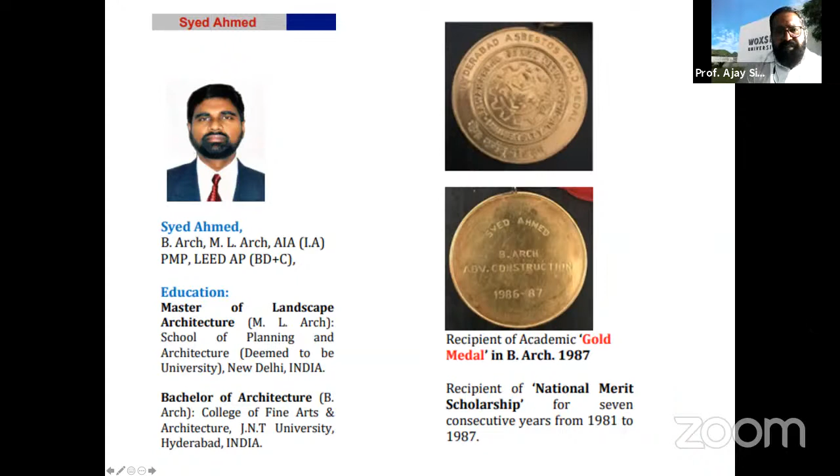Thank you, Professor Ajay, for a nice introduction. I would like to thank Dr. Amit Bhadra and Dr. Rahul. They gave very nice input. I am impressed with Dr. Amit Bhadra's knowledge about architecture and appreciation for Indian architects and Indian architectural monuments. Quite often, this is one of the best areas where we can see different kinds of architecture in different regions. It's more sustainable than what we are currently doing in modern architecture.

And also, like Dr. Rahul says, there are a lot of things happening outside in the world, which are much more interactive and more creative ways of handling the public realm, and how the cultural aspects have been imbibed within the design aspects. These are things we can learn from international architects, especially when you're working with starchitects and other big names. They know how to work with the local culture and also try to bring innovation, so that there is a perfect balance in the projects wherever they are doing them, whether it's Saudi Arabia or America or different parts of the world.

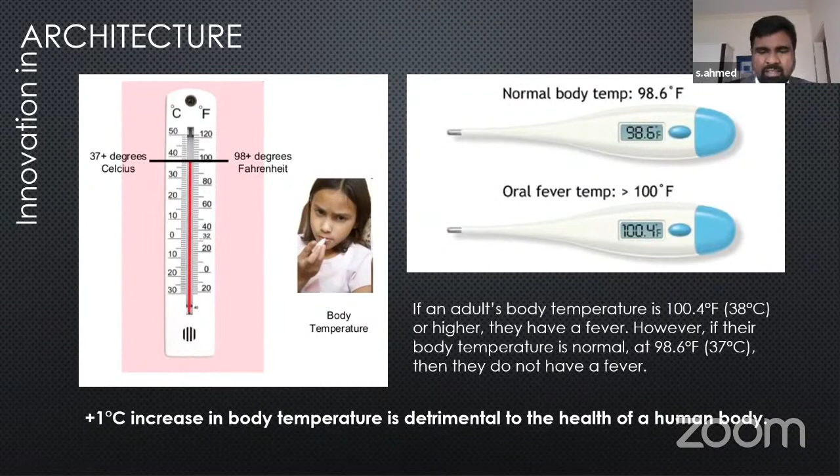You must be wondering, looking at this slide, that this has nothing to do with architecture. You're talking about human body temperature. Normally, a healthy person's temperature is around 98.6. If the temperature rises, what happens? We call it a fever. So a 1 degree increase in temperature makes a lot of difference in the health and well-being of a human body. Similarly, if we look into the big picture, the planet, what happens if it increases 1 degree centigrade? It will have a disastrous effect.

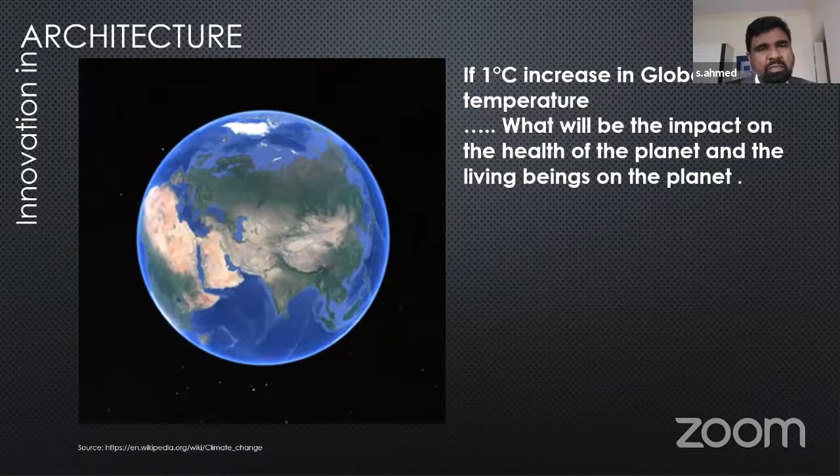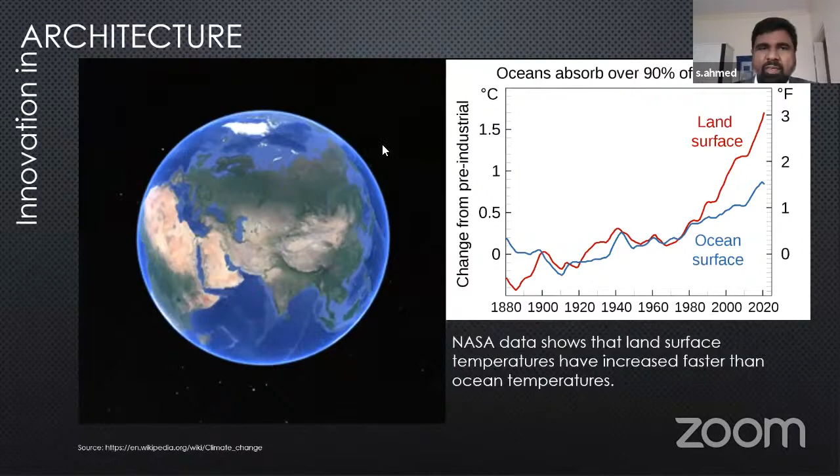Also, if you see the NASA data, it shows that land surface temperatures are increasing compared to the ocean surface, which is also increasing, but not substantially. So this is a very alarming situation we have now, looking at the global scenario. Of course, you can understand that we are talking about climate change, which is going to impact the environment. Some of the adverse effects of climate change are affecting the ecological balance of coral reefs, or extreme drought, which can also lead to forest fires, and landslides due to permafrost thawing, and also habitat destruction.

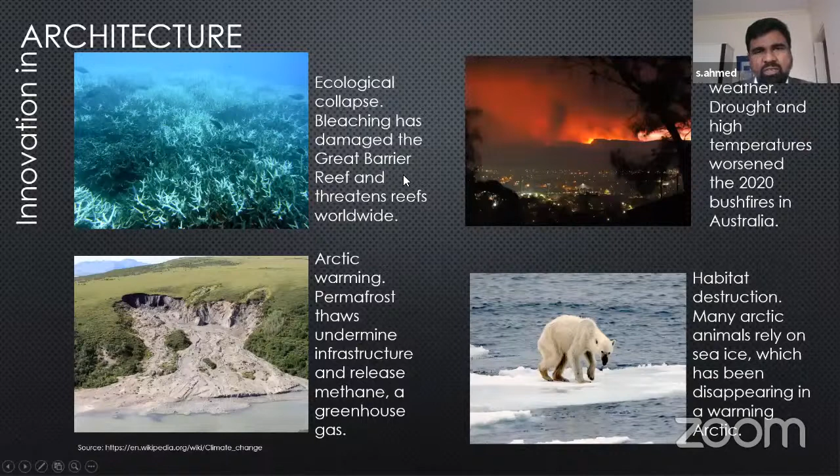And also, when there are temperature changes, the mild winters will allow more beetles to survive and kill large swaths of forests. And some of the environmental effects, like rainfall effects, lead to desertification. Also, sometimes flooding can happen. So these are all the ill effects of increasing the temperature globally.

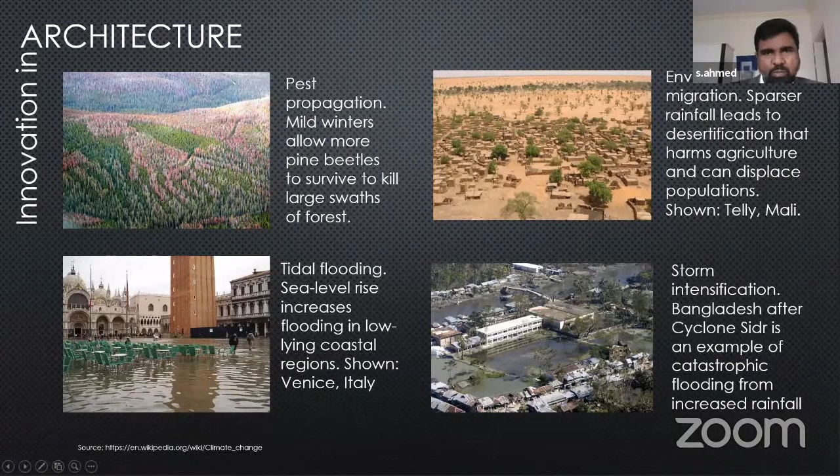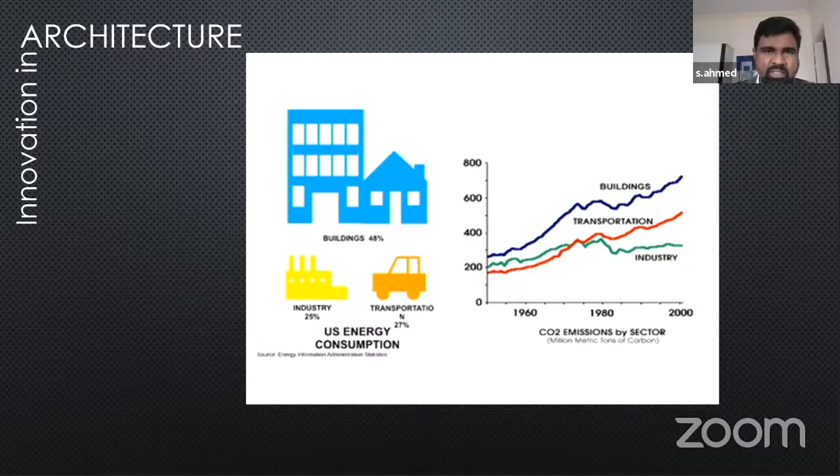So as architects, when we are doing new projects, are we really polluting the environment? To a certain extent, yes. And at the same time, as responsible architects, we should see how we can find solutions for that.

So in 2015, sustainable development goals were generated by the United Nations to combat global warming and to increase the quality of life. So there are several goals set. The objective is that by 2030 and 2040, most of these goals should be attainable.

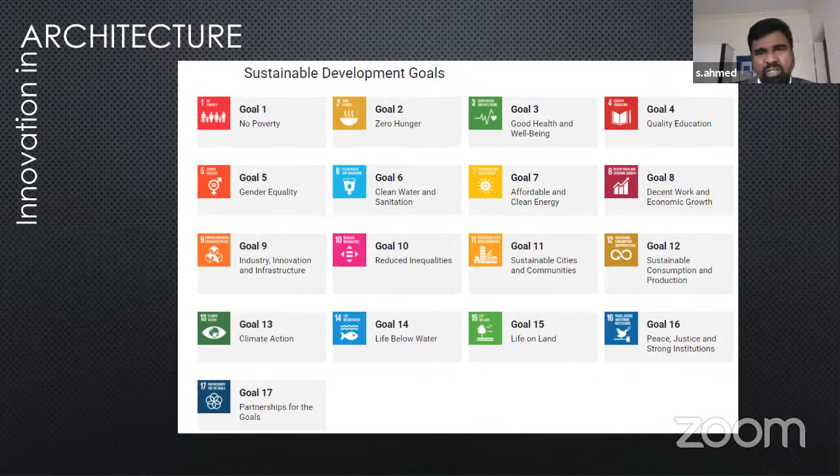So among them, not all are related to architects, but there are certain goals like industry innovation, then sustainable communities. Wherever our involvement is needed, we need to see how best we can contribute in helping the environment. So for example, goal number 9 is industry, innovation and infrastructure. So on the left side, you can see the challenges we have in terms of infrastructure and what the solutions are.

Poor infrastructure is a major barrier to good development. So we need to develop innovative and green infrastructure which can sustain for a longer period of time and which has less or no impact on the planet. Similarly, for environmental degradation, we'll have to create resilient infrastructure.

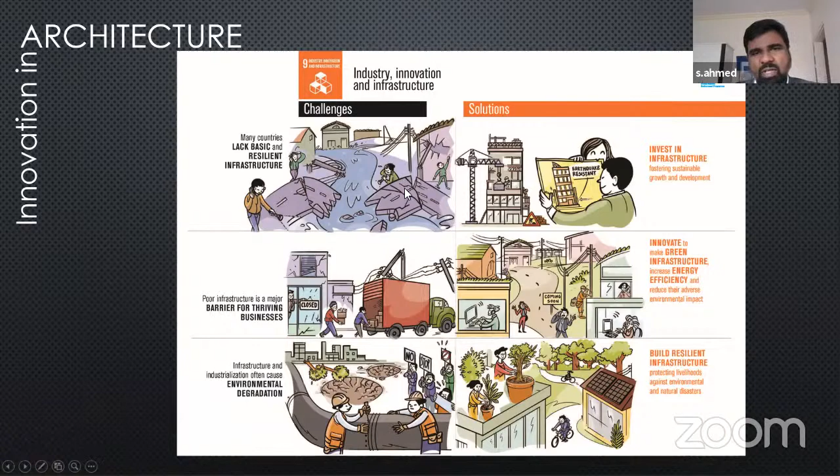Then sustainable communities. Due to rapid urbanization, especially if you see the slums in Mumbai and other major cities, due to migration a lot of slums are being developed and they're not being tackled properly. So we have to find solutions as architects at each and every scale, from small scale buildings to large scale buildings.

And most cities consume almost 80% of the energy, as well as generate 75% of the global waste and carbon emissions. So again, we have to see how responsibly we can manage our energy resources and energy usage.

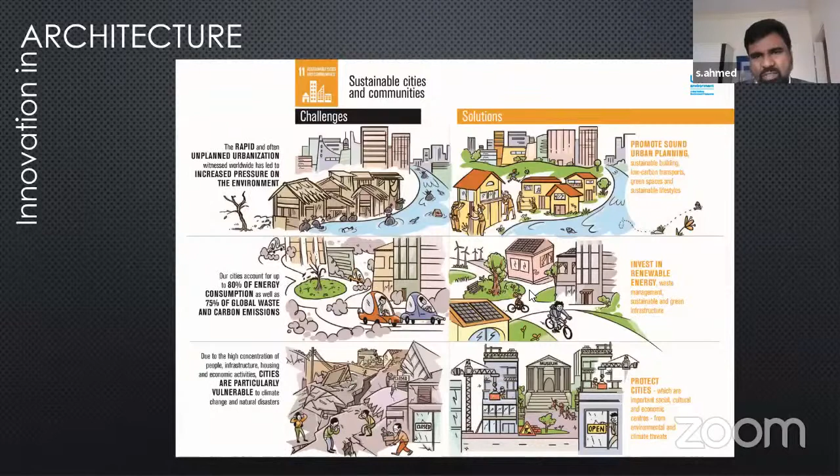So like I discussed earlier, global warming is one of the major issues, then storms and floods. So as architects, we have to find solutions in a more sustainable way. Similarly, dealing with desertification and saving biodiversity all happens at different levels of involvement of architects, landscape architects and engineers.

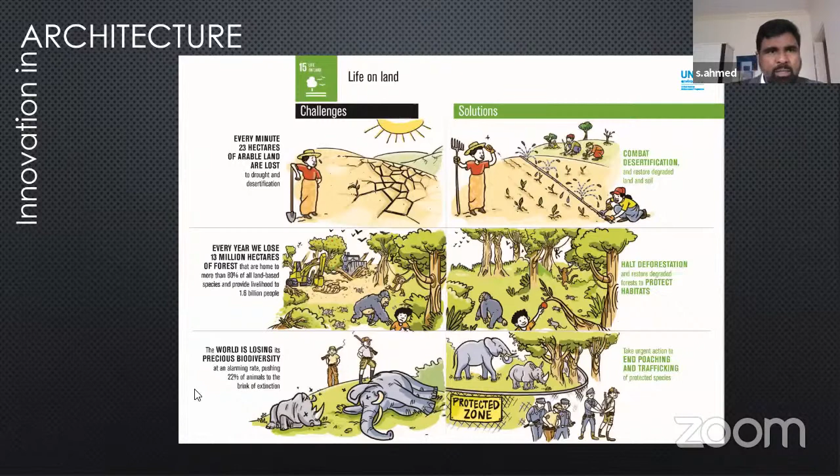So in a nutshell, climate change is everyone's crisis. As architects, we are uniquely positioned to help solve it. So the American Institute of Architects calls on architects around the world to support humanity's collective call to climate action through an unrelenting commitment to sustainable and resilient design.

Designing and constructing buildings that diminish greenhouse gases are architectural imperatives. Again, designing and constructing buildings that support health, safety, and welfare are ethical imperatives. So we have to see both architectural as well as ethical, and of course the cultural issues. Everything has to be looked into. So as professionals, we have the responsibility to prioritize and support effective action to exponentially decelerate the production of greenhouse gases.

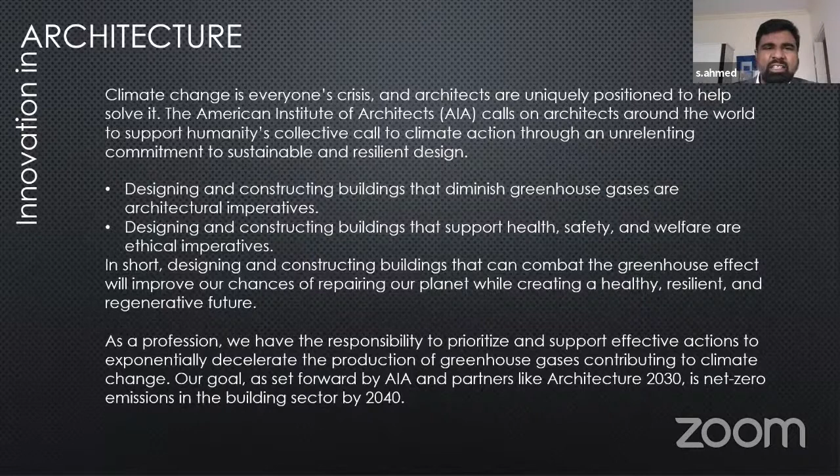So by 2030 or 2040, we should be able to control the emission of the gases. So how are we doing this? It is by sustainably designing the buildings. So it is our responsibility to work globally to reduce operational and embodied greenhouse gas production. Passive design techniques, again, like I said, most of the previous Indian projects and monuments are all designed based on passive design techniques. There is no active machinery used for cooling and heating.

Then employ energy efficient measures, adapt existing buildings. Instead of demolishing the old buildings, how can we conserve and reuse them in a more responsible way so that we really have very little impact on the carbon footprint. And at the same time, we have to look into the business and financial aspects to make all these projects viable.

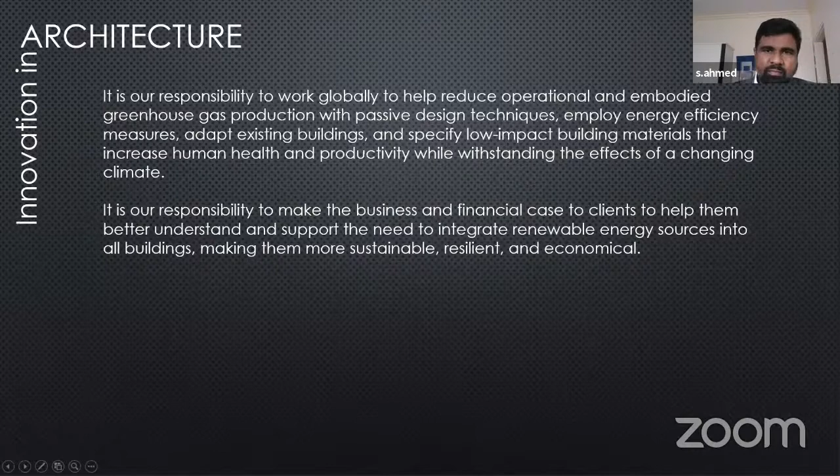So in this direction, sustainability is one of the key movements which has been generated. At this point of time we have various sustainable rating systems. I'm not going to list all of them here. Basically, BREEAM, it was UK based, started in '89. Then we got LEED in '94. Estidama is mainly for the UAE. So there are different ones; even in India we have green rating systems. These are all focusing on reducing carbon emissions and creating a good quality of life.

So among them, LEED has taken over and has quite a wide market range and reach across the globe. Some of the credits which I can talk about here are transportation, energy, indoor environmental quality, water efficiency, sustainable sites, and materials, how we are going to use the materials. All these are very important in sustainability.

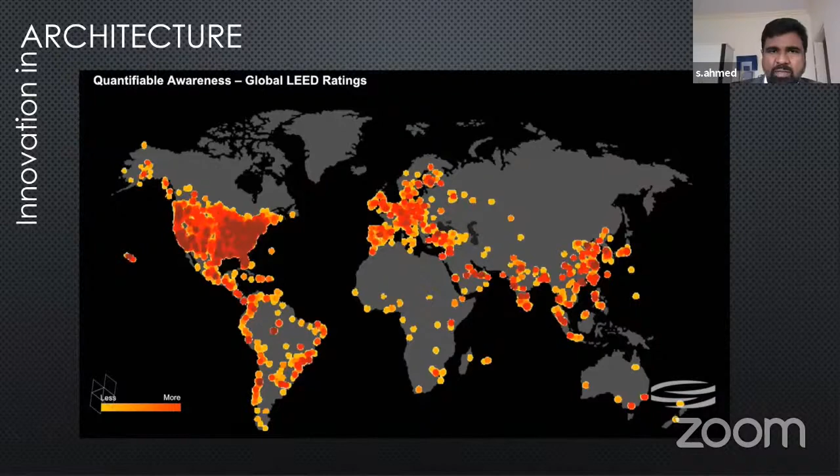So sustainability and innovation. Innovation is one of the rating criteria within sustainability. Innovation is implementing ideas that result in the introduction of new goods or new services. How best you can make the building very efficient, how you can help improve the quality of life of the users. This is what is required. In general, innovation is distinguished from creativity by its emphasis on the implementation of creative ideas in an economic setting. So we have to achieve economics in terms of not only the cost, but the material usage and the operational maintenance, all these aspects, which will have less impact on the environment.

So usually for any innovative process, there are 3 stages. You have to have idea generation. Then once you get an idea of how to solve the problem, you implement it. So this is the 3-step process which as architects we generally use, but to go beyond that level, for example, 1 + 1 is 2, that is simple mathematics, but how can we go more than 2? That is what we have to see in innovation.

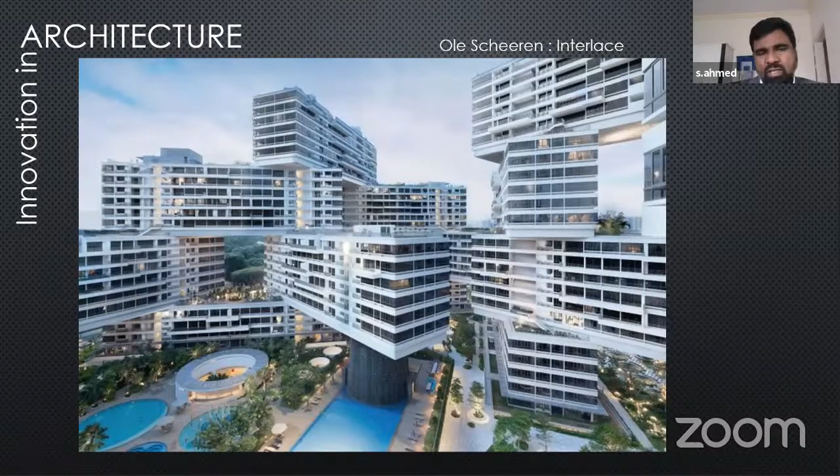So I selected a few examples to illustrate how architects are working to help the environment and to achieve more than 2. One of the projects, in Singapore, is The Interlace. You can see it's quite an interesting configuration of the blocks. This is an 8-hectare site with 1,000 apartments to be built. Initially, on the left side, what you can see is a cluster of high-rise towers, which would have been possible as per the building bylaws and local regulations. If it is built this way, then you don't have enough green space, and you'll be looking into each other's buildings. So there won't be any privacy, and a lot of issues.

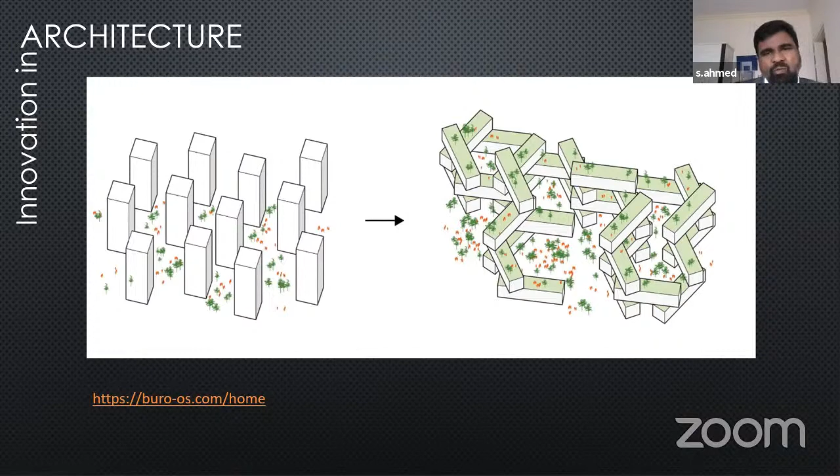So here, you see mathematics. The landscape area after the buildings is around 66,000 square meters, but the sky gardens almost have around 23,000 square meters. So put together, they have achieved 112% of green, which is much more than the actual plot area. So this is one of the key innovative ideas to bring into the project.

So this is like one of the benchmarks. I would suggest as students you should think in a different way: how best you can use guidelines, local bylaws, and then improve upon that to achieve more than what is required.

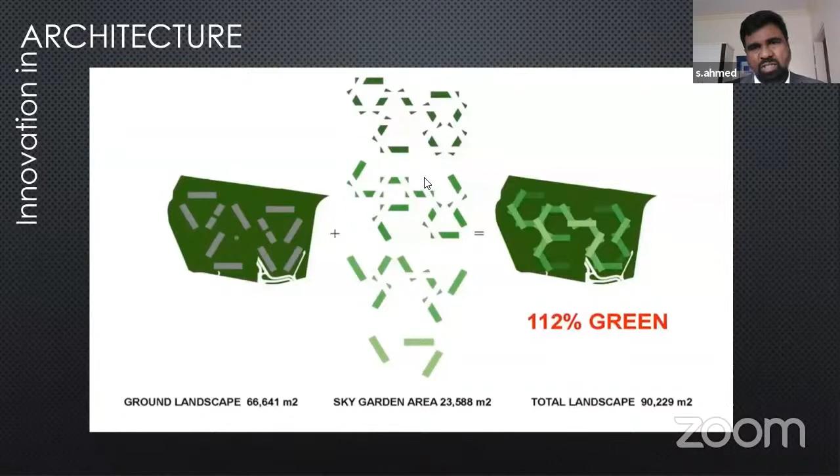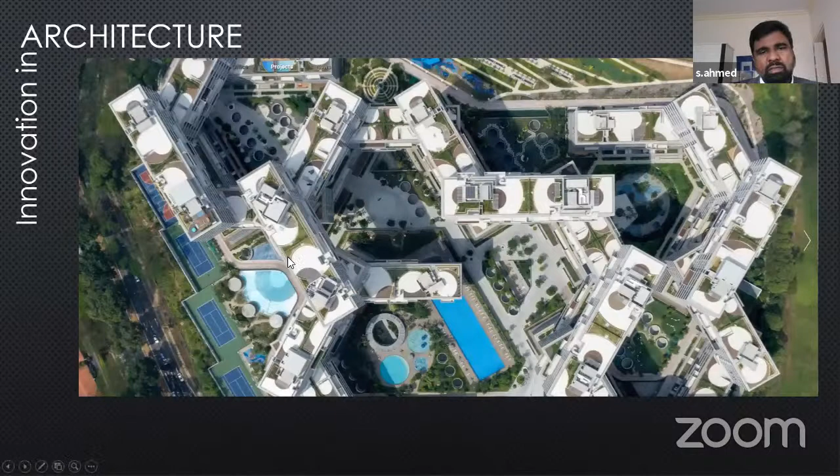So this is the same project with the aerial view. You can see how the blocks are arranged in a hexagonal manner, which creates a more open and lively environment. Again, this diagram shows the shading studies. The blocks are designed and located in such a way that most of the courtyards are well shaded and they provide relief.

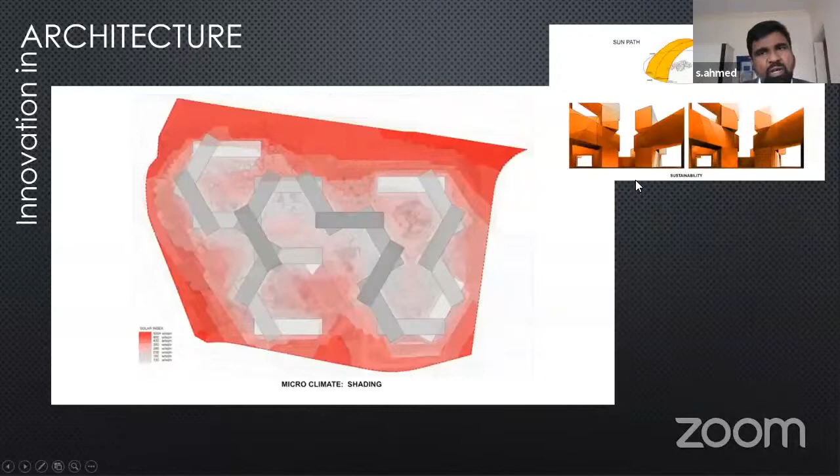So the configuration of the blocks, how you place them, how you orient them is also very important, of course taking care of the sun movement. Again, the same project: the water bodies and the wind directions. So you have to study the wind, the movement, how the water evaporative cooling is affecting the courtyards and improving the microclimate.

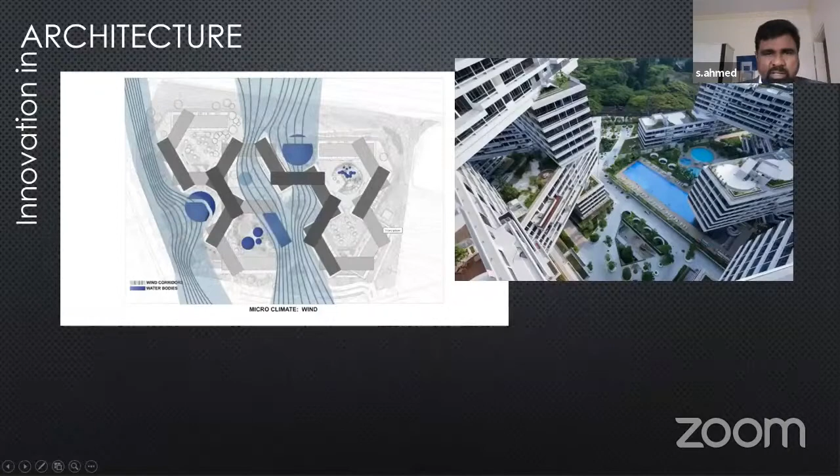When the new master plan was developed by Foster Partners, they tried to minimize the buildings and increase the landscape area. So it looks like a forest. The building is within the forest. It's not only giving the form, it looks like a satellite placed within the dense Amazon forest. That will create a very nice microclimate, and also it reduces CO2 emissions. It absorbs a lot of CO2.

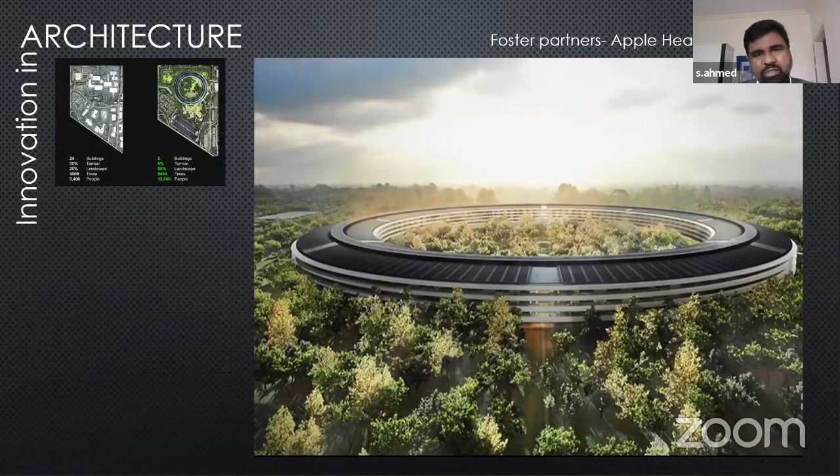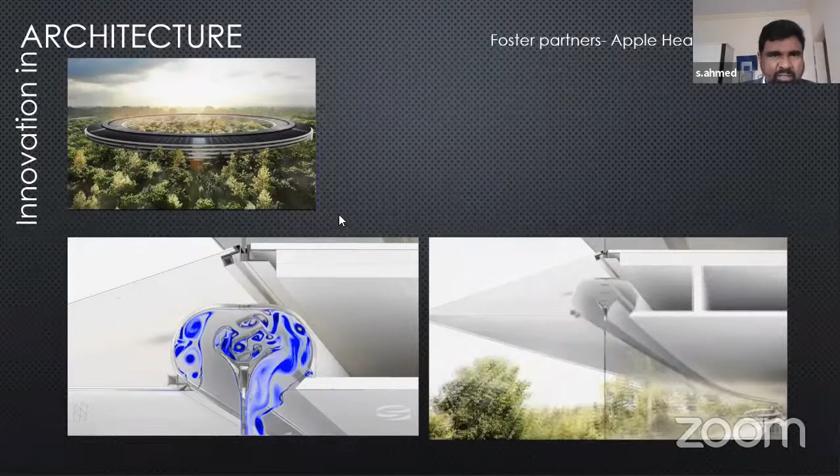And one more example which I would like to share with you is by a Danish architect who is practicing in different parts of the world. It is a waste-to-energy power plant. Usually a power plant using waste is just a building not to be visited. But here the building has been designed in such a way that it has become part of an educational project. In Denmark, they don't have any hills, but they have the snow. So he invented an idea: why don't we use the size of the building in such a way that you can use the roof for skiing.

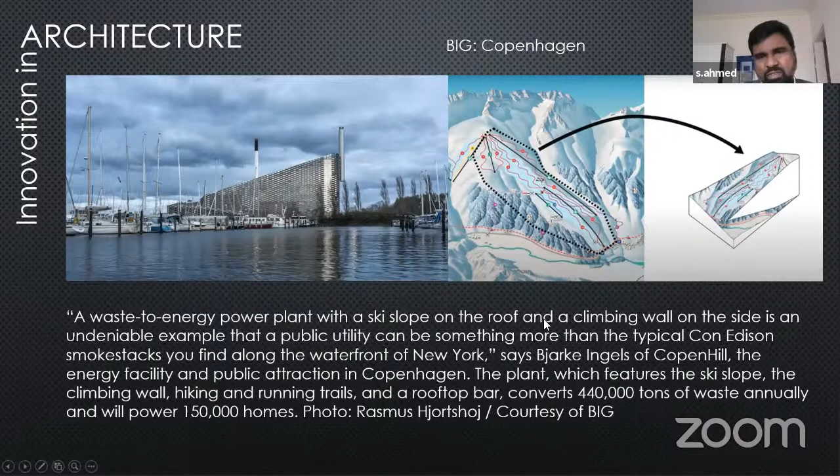Also, you can see in this picture how the roof has been used as nice skiing slopes, and also wall climbing, trekking. There's a lot of activities. So the building has been created as multifunctional. At the same time, it's producing energy out of the waste. So these are the ideas. Once you start looking into how you integrate the local requirements, the functional as well as the cultural requirements, you create something new which is not available. So these are some of the best examples of innovative architecture.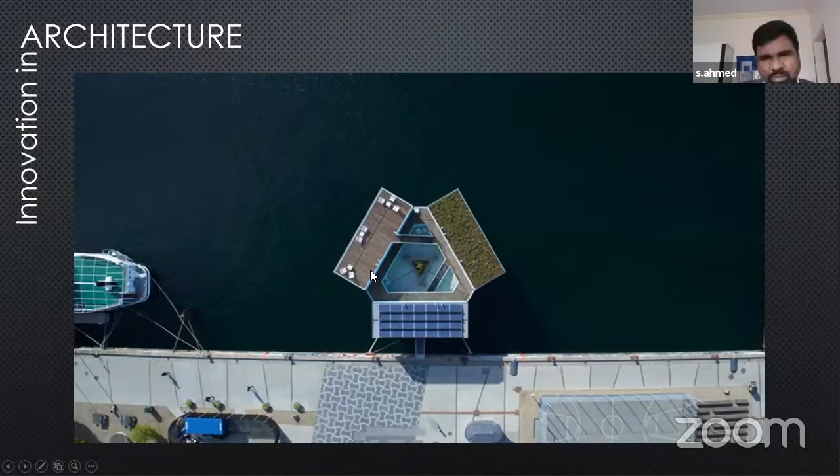Again, one of the projects developed by BIG team uses cargo containers. They built student housing. It is like a modular one, using containers developed on a floating dock. This has been built somewhere, brought to the site, and installed here. So the idea is low cost, quick construction, and when there is a shortage of land, you can expand into the water. So this is like one cluster which is self-sufficient with solar energy generation as well as natural cooling.

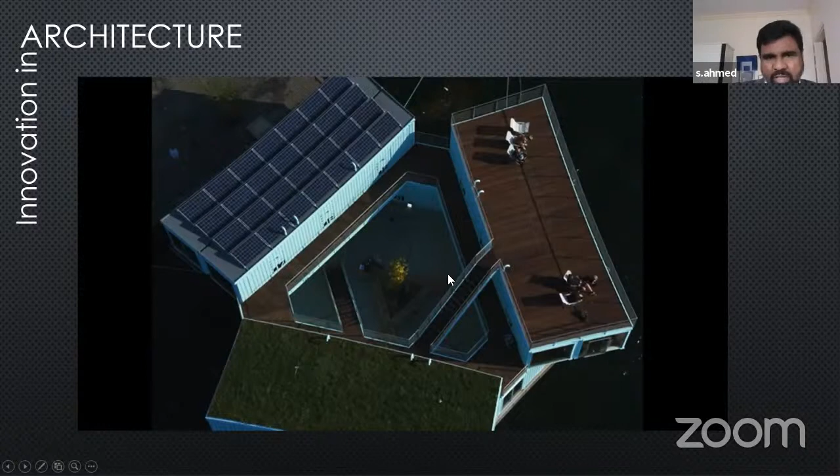So these units, if you see, have been joined together to make a cluster of buildings. And this has been anchored, if you see in the section. In the lower part, which is sunken in the water, they have hydroponic gardening inside, and the upper level is a 4-story structure made out of wood. So the materials used are also innovative. We really don't need to always use steel and concrete.

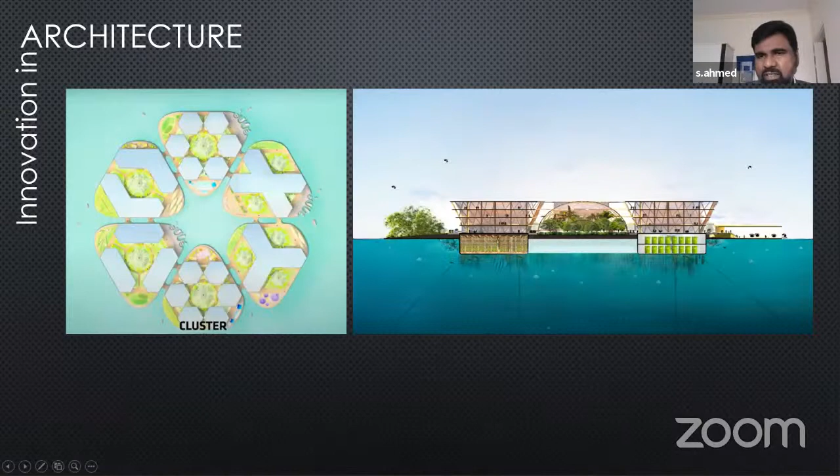So this is one of the concepts where we need to expand these clusters like a floating city. How can we do that? These are some of the different concepts for where sea level is rising. So we design to mitigate those effects so that we can actually get a floating city.

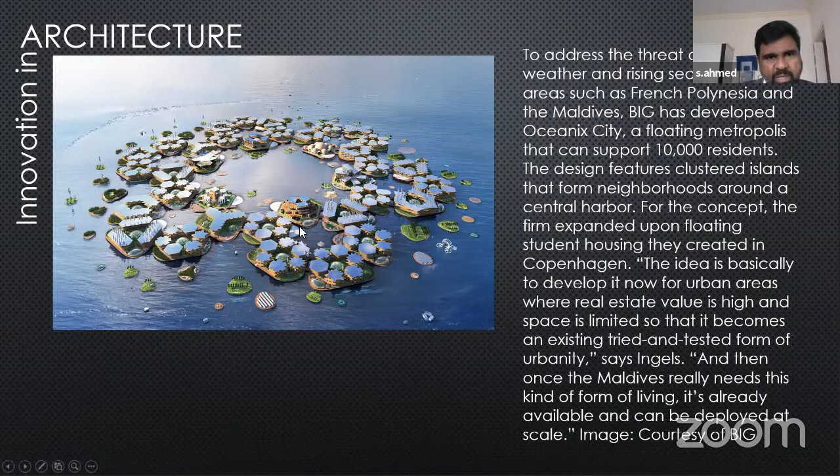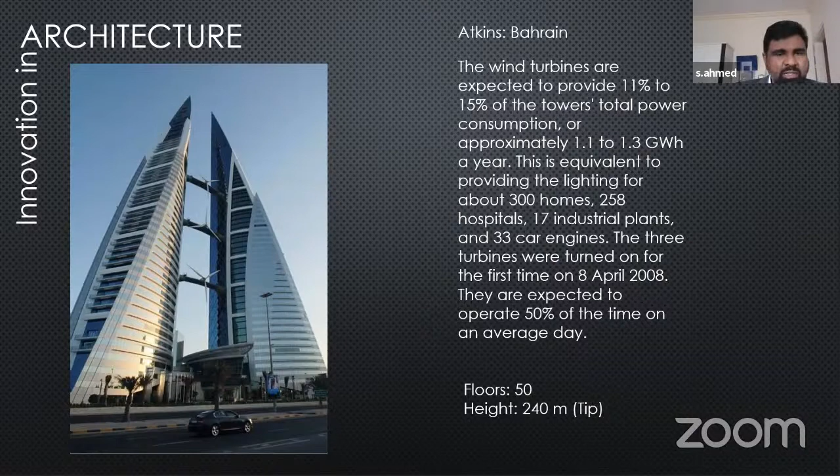The buildings have been designed in such a way that the wind funnels in the V shape, so that creates enough draft for the windmill to work. So all over the world, architects are trying to see how best we can utilize the current technology in terms of construction methods, available materials, and how to reduce energy consumption and the carbon footprint. This is another view of the same project.

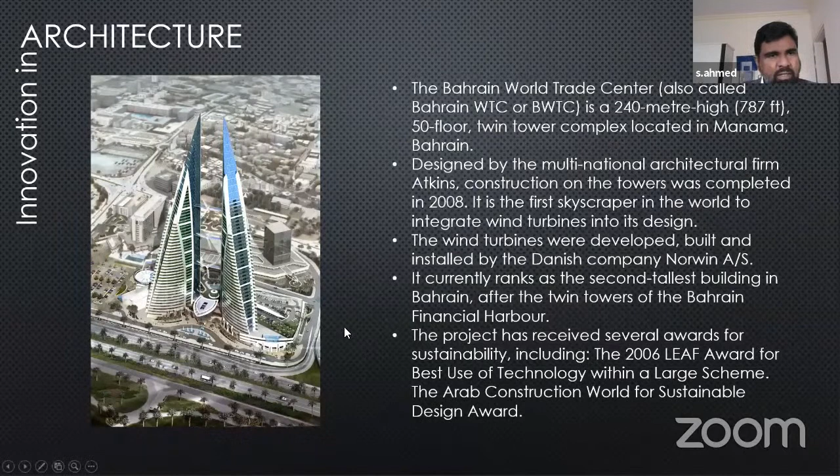Then there's one more recent project which is done by Gensler, which is now the second tallest building in the world. The first tallest building, I think all of you must be aware, is the Burj Khalifa, which is in Dubai. It is 830 meters. The second tower, which is in Shanghai, is 632 meters. So what is the specialty of this tower?

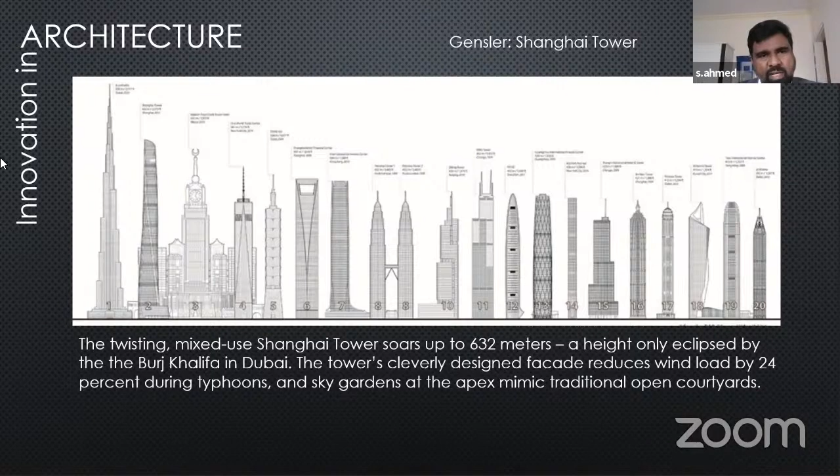This tower has been built with a unique shape. If you see, it is not any regular shape, it has been twisted to create less impact of the wind. So when they did the wind tunnel testing, they tried to optimize the shape and the rotation. That way they could save nearly 24% of the energy and the cost. So almost $58 million have been saved just by shaping the building in a proper way.

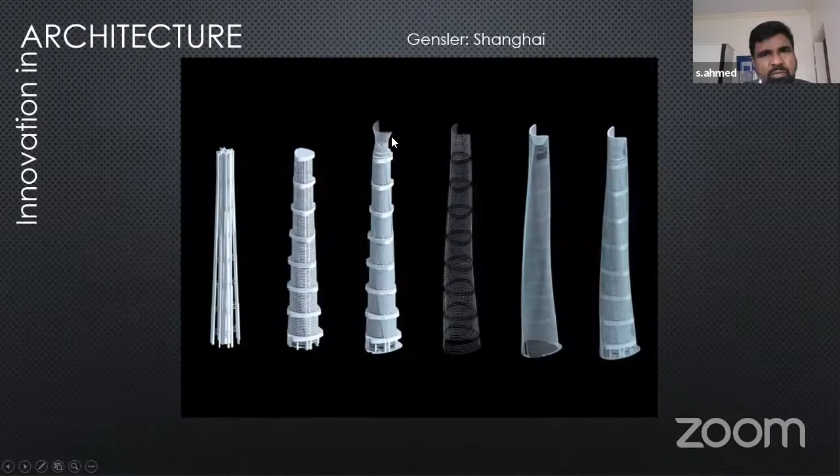So a lot of engineering has taken place, especially the wind engineering and the forces, how it will be designed. There are some of the models which show you how the structure is stabilized and how the rotation of the tower has taken place. And again, it's a double skin building where the outer skin is quite translucent, so it also reduces heat gain. So this is one of the LEED platinum buildings.

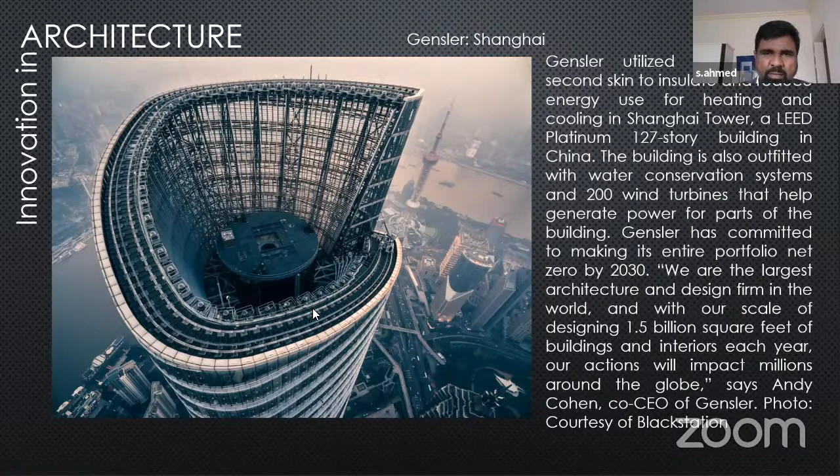And coming to the projects within Saudi Arabia, this is one of the projects which we worked on with Norman Foster. It is the Haramain high-speed train stations. There are 4 stations within Saudi Arabia: Makkah, Jeddah, Medina, and Rabigh. These are the stations designed in a prototypical way, but with slight variation in terms of the colors and whether it's a terminal station or a pass-through station.

If you see here, Islamic cultural aspects have been taken in shaping the forms, but at the same time, the daylighting has been achieved with minimum perforations within the roof as well as in the fenestration. So during the extreme hot weather, where in summers it can go up to 45 to 50 degrees, still you don't need too much cooling here because of the high ceilings and the limited perforations. This we worked on as collaborative architects with Foster and Partners.

This is one of the stations in Jeddah. Again, all the outdoor activities, the connection bridges, everything is fully shaded to create comfort, and there is a lot of landscaping well developed in this area.

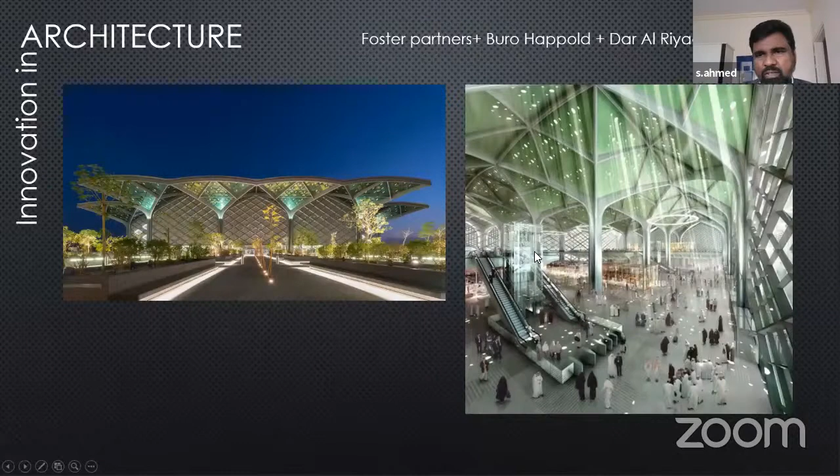This is another project, the healthcare project, which we have done in association with Cannon Design. Cannon Design is a healthcare specialist, and we are the joint venture partners with them. So this is one of the existing hospitals where almost 70% of the site is fully developed. So we hardly had much space left for designing and locating the new program of the Biotechnology Center, 330-bed cancer care hospital, and VIP wings.

So here we tried to see how best we can orient the building, and also there was parking all along the surface. This parking has been removed, creating more green areas. All the parking has gone to the 3 levels of basement, which is naturally ventilated, so very little reliance on mechanical systems. Also, there is a 1.4 kilometer long internal tunnel which is supplying all the utilities, infrastructure services, food supplies, and pharmaceutical supplies. Everything is happening there.

So this is one of the projects within the King Faisal Hospital, which is yet to be constructed. This is the Biotechnology Center. So here the main idea is to create a more healing environment for the hospital. This is what has been created. The surface parking, which was there earlier, has all been removed and taken down to the basements, and all the surface has been created for nice green landscapes. So this is one of the award-winning projects.

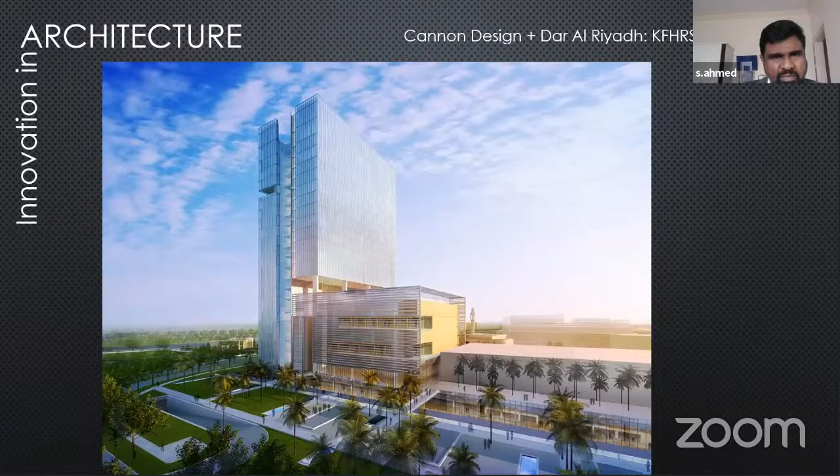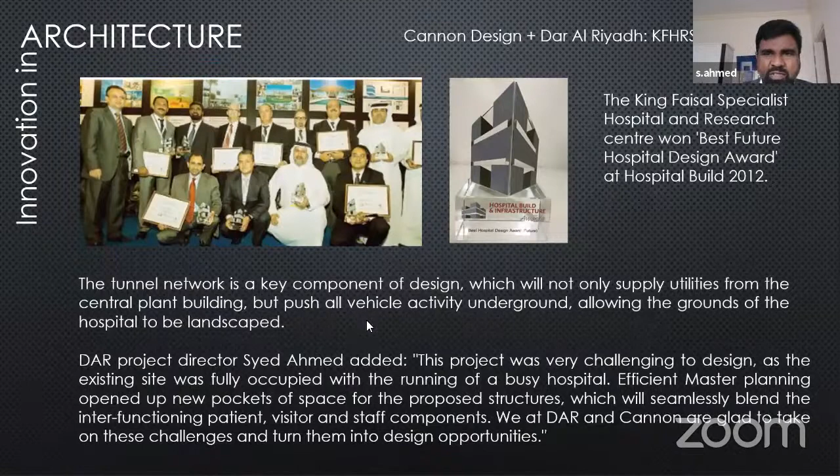And apart from the large buildings, we also work on large master plans. And this is one of the race courses. Here, the main challenge is to create enough water for the plantation, as well as maintenance of the desert plants. This is a world-class race course, 3 kilometers long. And the buildings were designed by Hong Kong-based architects, Leigh and Orange. And we did the master planning and landscape.

Here, the innovation is basically when you are looking from the grandstand, there are a lot of sandy winds because the surrounding area is quite a desert area. Always there is dusty sand coming up. So to create a kind of a backdrop, a small hillock has been created, and with the plantation that will mostly filter the winds which are coming to that area.

So in a nutshell, what I was trying to say is, whatever project you are doing, you should try to see the local environment, the technology available, the material available, and how you can use it in the best possible way. I could not show you many other projects which are quite small in nature, but it doesn't need to be only the big projects. Even in small projects, innovation can happen at any scale, right from furniture design to the interior of a house, to a small community or big projects.

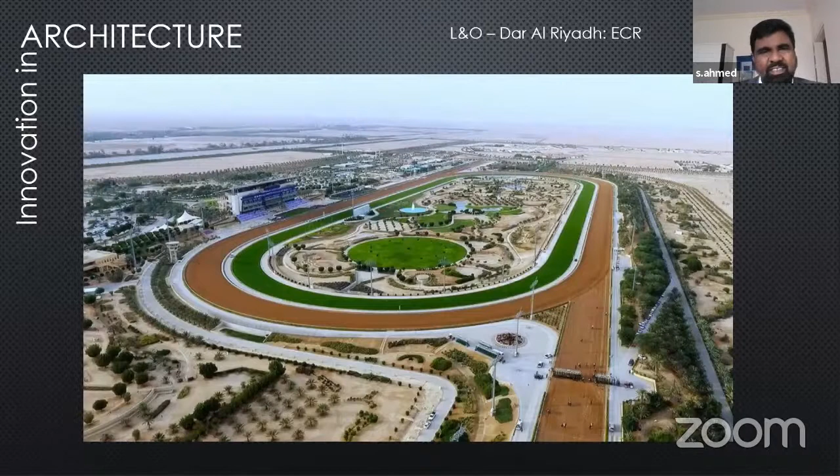Thank you for this wonderful presentation, sir. And thank you for, again, making a point about creating awareness on that 1 degree temperature; it was a very solid point, I suppose. So we need to start looking at that 1 degree, how to reduce that 1 degree. It will make a whole lot of difference. And thank you for letting us know about the innovations in architecture. And I think this is rightly needed for students who are just starting out, the first and the second years. Starting off from here is always good for them.

And thank you for introducing some of your projects and also projects from other architects like Foster's and BRK; we have been discussing BRK a lot in our sessions also. And there's one project of BRK's which we did not actually have a look at, but we'll definitely cover that project also. And cargo containers is one of the problems which we are trying to give even to the first or the second years. So, thank you, sir, for giving a heads up that things like this are there, so you also can try and do something.

And your projects, like working with Cannon Design and KFHRS, I think there was a whole lot of innovation involved in that. I was waiting to hear more from you, but since it was only the first and second years, you might have had to cut it short. But I do hope in the future we are going to hear a lot from you, sir. And definitely we'd like to be more associated with you. We'll definitely keep in touch, depending on your time and availability. Sir, it will be my pleasure.

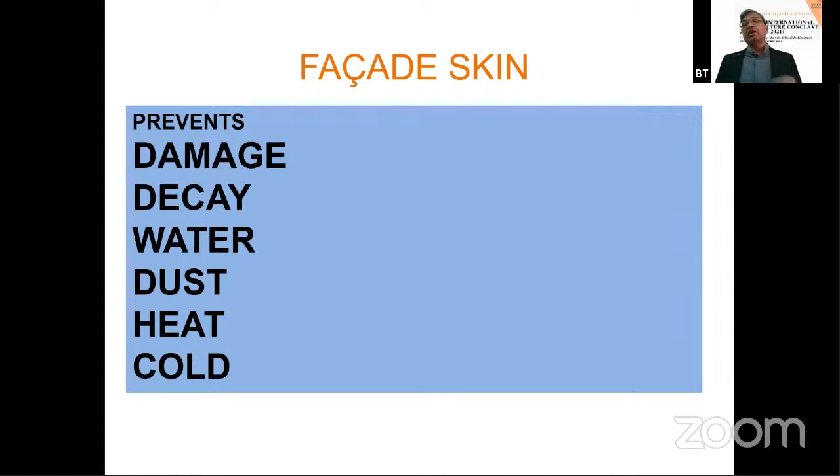And so by protecting one from outside to inside, architecture does this in many different ways. How you treat your facade, how you treat a particular face of an architecture, is also giving it an identity, because you create a person's identity by its face. And in the same manner, it is expressing what the building wants to say. Does the building want to say it's a museum, or a house, or a courthouse, an office building, or something else? So it has an expression built into architecture.

When we had an opportunity to speak to Foster a long time ago, there was a conversation about what he does to his buildings. He treats all the buildings most effectively by saving energy and using the purity of structural work. So there was a question: can I drink wine from a teacup and tea from a wine glass? Both are serving the same purpose, because the liquid takes that shape and then you drink it. Why not a wine glass be used?

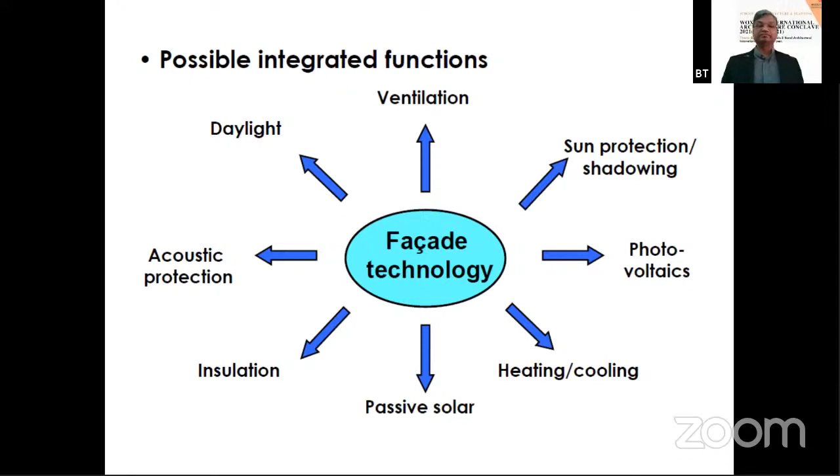And this can be done in many, many ways, because when you separate the skin from the main masonry or main, what we call rain screen of the building, then you started to evolve into architecture that's multi-layered. You're no more having a building that has just 4 facades. You have basic 4 corners, 4 envelopes, but you started exploring the front, or the roof even, into multi-layers. The multi-layers will become attractive to basically do a few things.

Most importantly is the heat. You're trying to protect from the heat or generate heat. So in colder climate, they're trying to generate heat to the buildings. In the hot climate, they're trying to protect the interior from the heat. So for example, if we take the Middle East, the outside temperatures go up to 50 degrees under the shade. 50 degrees centigrade under the shade is not a comfortable temperature to just go out.

But you want the temperature inside to be about 21, 22 degrees, which is a comfortable temperature to work, live, or play. So that 30 degrees of separation is created by having innovative materials like triple glazing these days, or creating multi-layered shading in front of that facade, so that it is first of all protecting. It's trying to transition from 50 degrees to 20, 25 degrees. So that's very important. By doing these multi-layered facades, you are trying to create major energy transfer into the buildings by this.

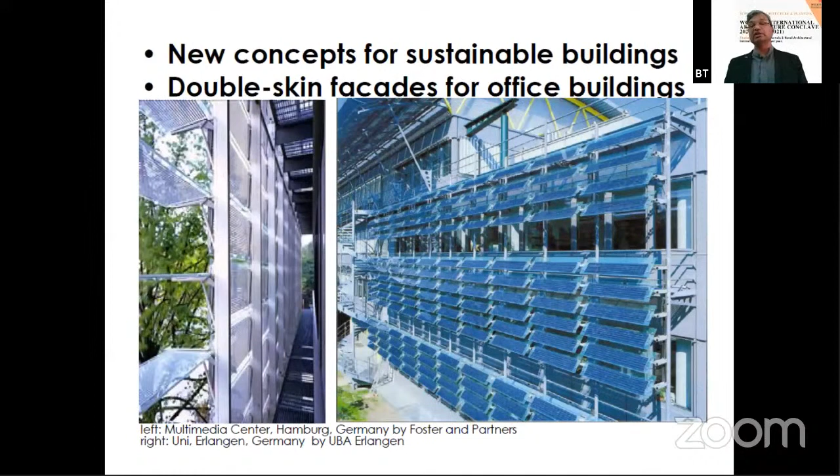It is not just energy transfer or saving the inner climate from the outer climate. It is now becoming an energy saver, because the more you save energy by not allowing the heat to come inside, or not allowing the cold to be heated by generators or heaters, and the facade is purposefully doing that function, generating the heat or cold by itself, cooling the building by itself. It is actually saving energy, because most of the energy in the building is consumed by the comfort that we are trying to achieve with mechanical means, that is cooling or heating the building interiors.

So if you go to any of the malls these days, the entire mall is air conditioned. So that means at the back of the mall, you would see so many generators working and so many air handling units working, pumping cold air into the project. So all that is consuming natural resources, that is generators being run by diesel, all the energy that is coming from coal plants probably. So all this is energy consumption. So what we are trying to do is save that energy by blocking the heat from coming inside.

So instead of 50 degrees centigrade outside, if you block it by any means, the next layer will be about 10 degrees less, maybe it's 40, 30 degrees, then the layer of your envelope would further protect you maybe another 5-6 degrees. So your cooling of the building will be reduced quite a bit.

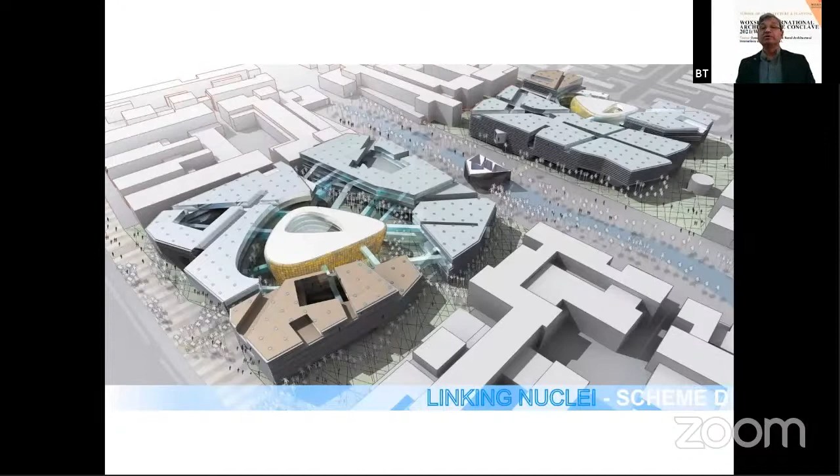So the building facades actually are generating energy, generating electricity, which is being used within the building. So you are neutralizing whatever energy you would like to use for the building by generating it from the outside shape of the building. So I'll quickly go through some visuals and see how buildings are being attempted.

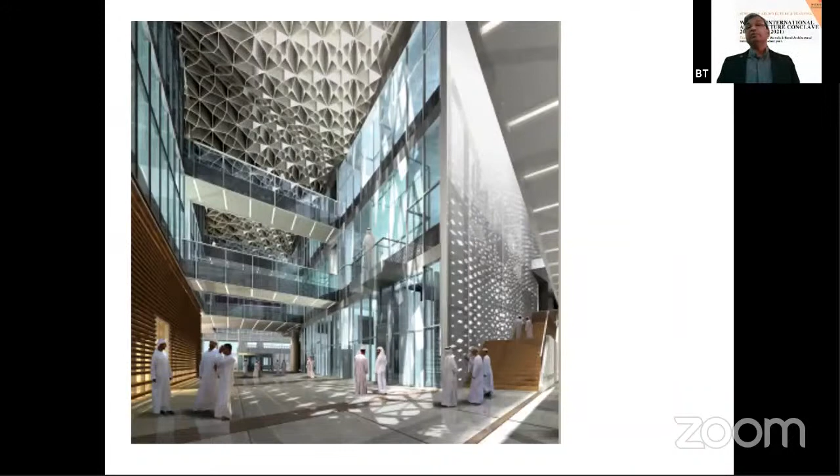These are multi-layers of facades. This is a building by NBBJ, College of Science. Most of these are institutional buildings that I worked on, which have several layers of built-in aluminum or fenestration facades. Aluminum is a great material when done appropriately. It cuts off glare, cuts off energy or heat from directly transmitting in. For example, this one is innovatively done by creating a diamond-shaped shading, which is attached by structural means to the outside skin.

So what it does is a couple of things. One, it doesn't allow the sun to directly come in. So the 50 degrees temperature is being blocked and it's shading the glass behind it. But at the same time, if you see the fountain below, it's trying to cool the air below. So that cool air is being passed on between the skin and the facade, trying to revolve the air around the building so that it creates an inner courtyard kind of arrangement within the skin.

So on the right, you could see how the facade has been jointed. Here, it's a very standard approach where the louvers, which Le Corbusier used many ways in concrete, but here it's a skin that is attached to the major glass wall or the curtain wall behind it. The vertical louvers provide the shading from the west, which is a very hot sun in Kuwait, to allow shading into the building.

Sometimes, when we have to bring in natural light, the roof has openings, roof lights. The roof lights have now been provided with solar panels as well as withdrawable shading devices. It could be fabric, it could be something like this, which can be drawn back and then opened up when the climate is better, or closed off when the climate is too hot.

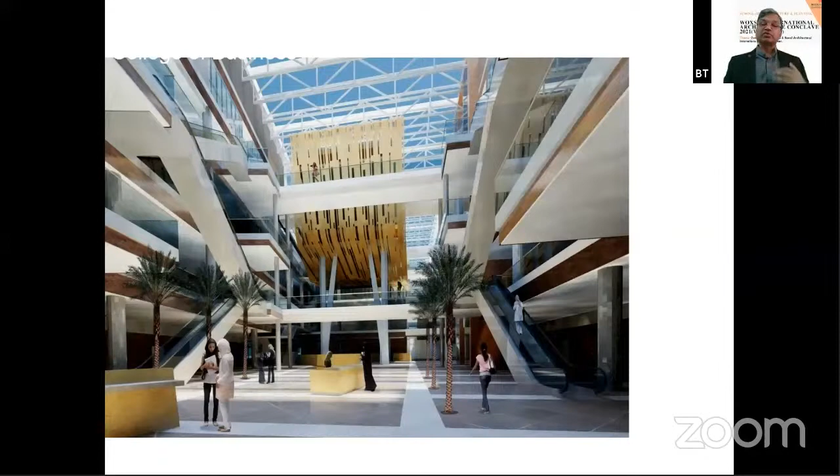And the other aspect is using GRC, for example, glass reinforced concrete, in this way, where the architects used it innovatively to envelop their buildings into a complete facade where openings are kept only to a minimum. Anyway, these are examples from the very hot climate, but you could do the other way by allowing the light to come in and produce heat onto the glazing, so that your heating load is reduced in colder climates.

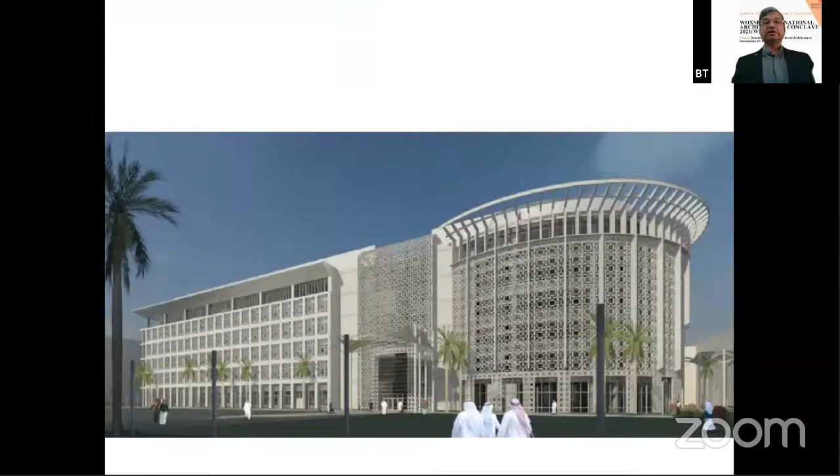Here, the same thing. Originally, the architect's intention was to put glazing, a completely glass facade, then it turned into a fiberglass facade, which is protecting it from outside. So this is the in-between space where there is the glazing and the actual facade. Most of the time, this is not very new to the Middle East, because in the Middle East the climate has always been a problem, and architects found different solutions.

There is a word called mashrabiya, which is like a jali work, what we call jali work in India. Many of the balconies have a jali in the front, and it allows you to go there and get cool air, because it's got smaller openings. When the hot wind hits it, it gets reflected, and when you are sitting inside the balcony, you feel cool air coming in, because the hot air is transmitted into cool air. And this sort of does the same thing.

They create an aluminum kind of jali work around the building, and with the wind flow, try to cool the facade, which is inside this jali work. This is the space between the jali or the mashrabiya and the actual facade inside.

Another interesting building by SOM architects, where they have coined this as a form. Shades of Knowledge is the name of the building in Arabic. So this created completely a building within a building. They have enveloped the entire library, actually this is a library building, with another shaded building. So the outside aluminum panels have graphics. In fact, they were designed by artists themselves, looking at Islamic architectural patterns and how they can be transformed into something modernistic and innovative.

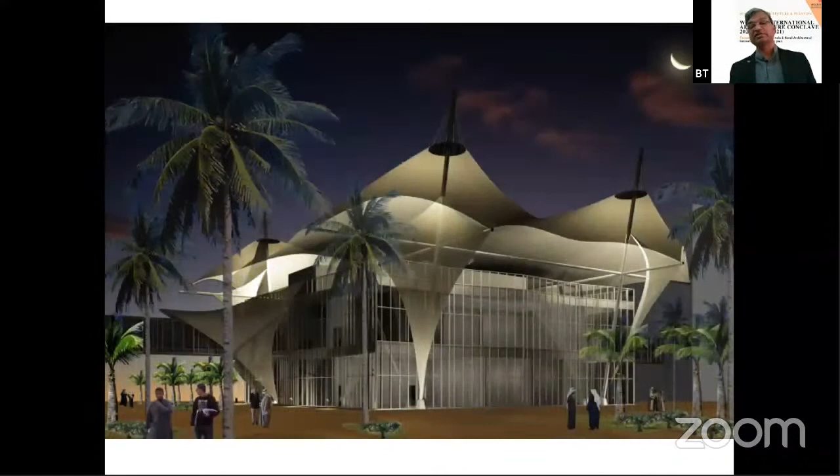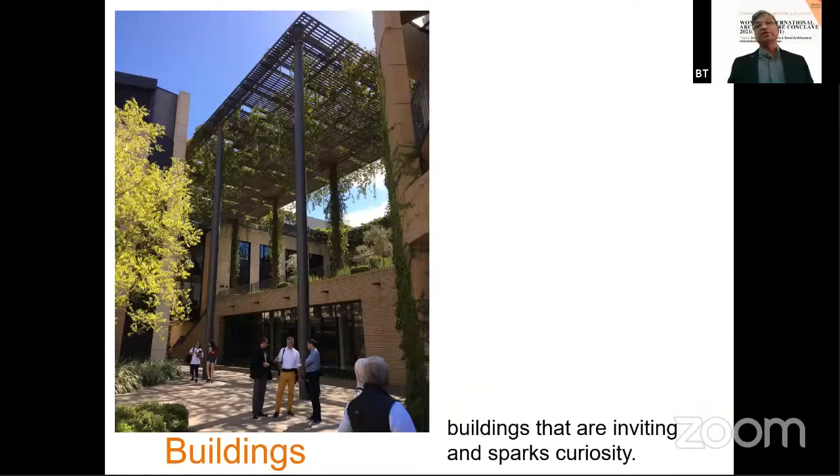And sometimes the shade is provided by fabric, and fabric shades are plentifully used in the Middle East. And the roof, of course, is another way to do it. Roof and facade are sometimes bound together, and that creates a shade, first of all because the sun is most of the time vertically placed. So once you protect the roof and draw shade onto the roof, you are actually saving a lot of energy that is going into the building from the top.

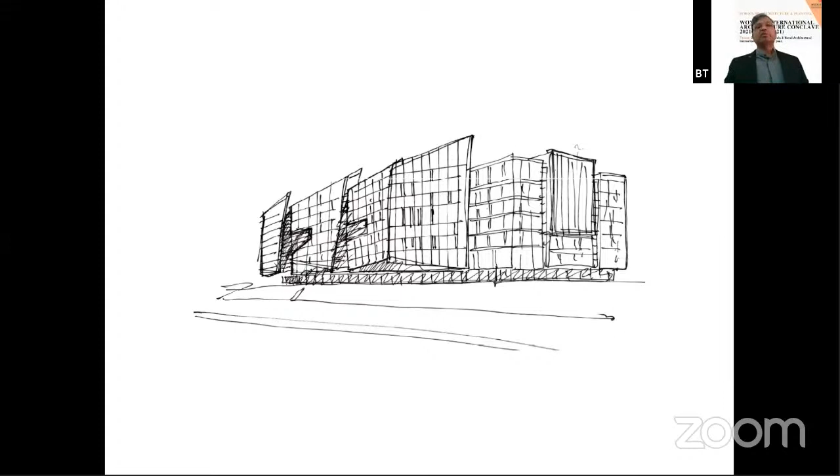So this building is now being drawn as a sail. What you see is an architect's sketch drawing a multi-layered facade on the top, like sails that will protect the building inside. Somewhat like this.

These are famous architects. This is Alibaba headquarters from Hangzhou by Hassell, a very famous architect, again doing a similar work. Look at the facade differences, because the one that we are facing has got a lot more openings than the one that is on the side, because that is an elevation that's on the east. So they would like to have the eastern light. Eastern light doesn't have too much heat, so that is allowed inside, whereas the western light is being blocked.

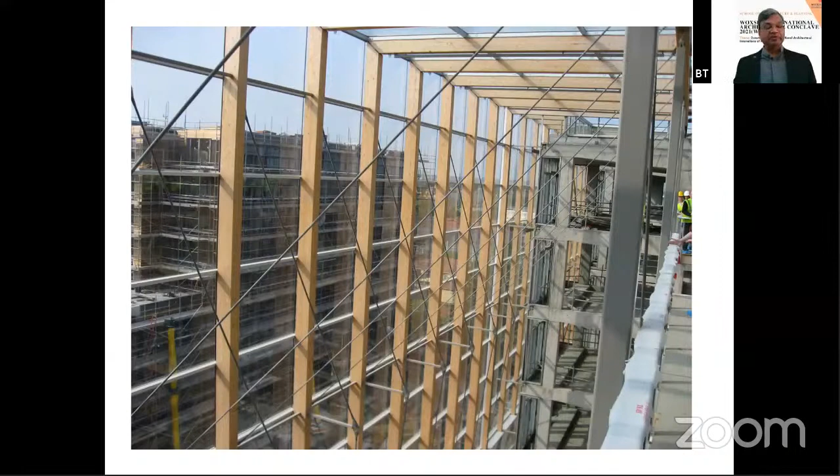In terms of when we do that, the skin requires to be really integrated into the building facade behind. That is done by structural means, whether the structure is linking from the slabs or from the roof or the floor. So always there is a structural integration that has to be collaboratively done. And it is also drawn into the interiors. When you design these skins, the light that penetrates into it creates lots of these mural kind of atmospheres inside.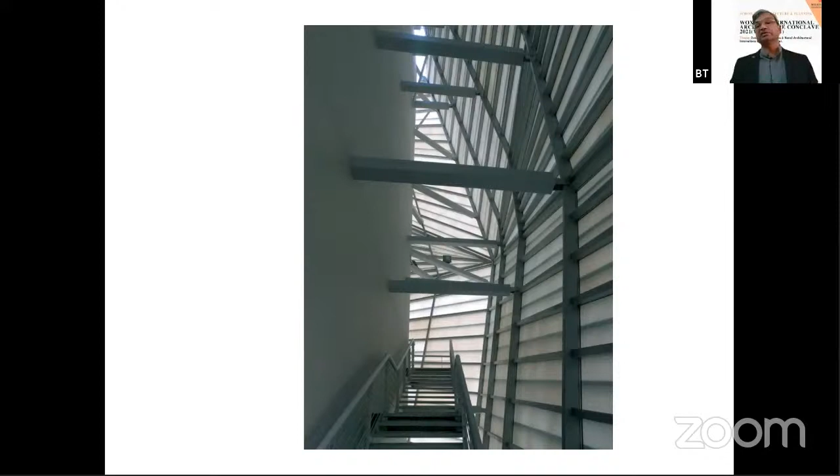This is an example of how the skin is being supported onto the wall behind and provides you these ladder and lid spaces for maintenance or anything that is behind those skins. There are many innovative ways for doing that. It's a very similar example I talked to you about, how the glazed wall is being etched so that in the night it appears in a different way than the day.

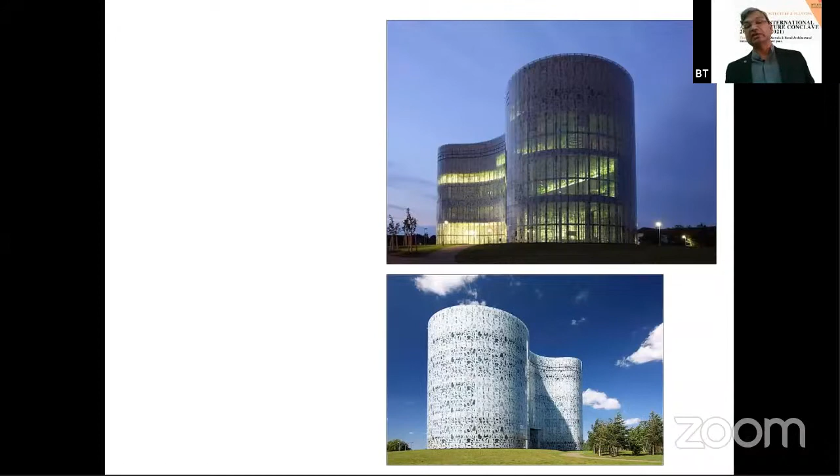The facades now are dynamic. They change with the climate, they change with the sun, they change with the dust and wind. Many architects have worked on it, and these are dynamic second facades that produce energy and sometimes advertise themselves as buildings by light. So it's basically how you sell your building; particularly for commercial corporate buildings, the facade is an element that sells their product, their building itself.

But there are ways also coming into the picture, which are green buildings or green clad buildings, wherein the second facade puts on a facade of greenery, complete greenery in the front. Can we call that green skin? That's coming in. Some European architects have done it very well.

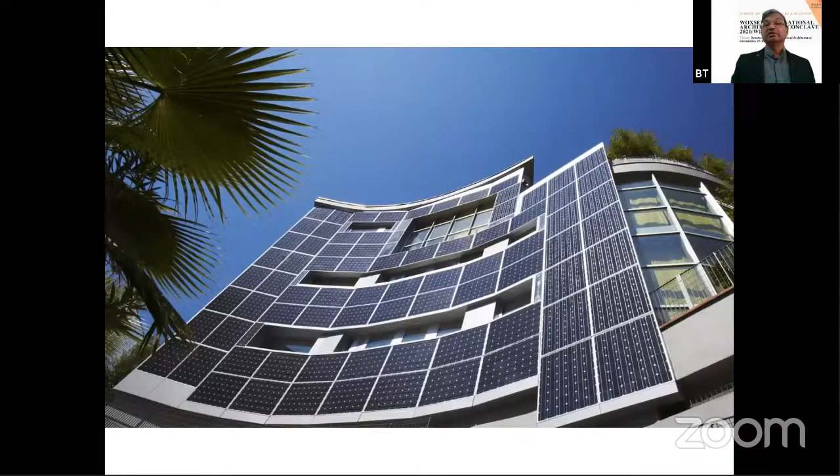And solar energy and the efficiency of PV panels is improving. The effectiveness of gathering energy is improving, and these facades are becoming more and more popular, so that facades not only protect and save energy, but actually produce energy. A similar example where the solar panels are clad on the facades randomly, but this is actually bringing energy to the building.

I'm sure the next speaker will talk a lot about the innovations in terms of structural work, how difficult a process it is to actually build a facade. This is an example of trying and testing the facade and whether it's working in terms of solar gain, heat gain or heat loss, as well as how structurally stable and how lightweight it is so that we can save the structure. So there are a lot of things that come through when you look at facade engineering.

And of course, everything comes with a cost. As soon as you say a second skin: how much will it cost? Because you're not just putting a skin, you're applying makeup to it. So there is always a cost component when you design a double skin facade. But you have to prove to the client, or to yourself first of all, what the second facade provides you with. Because as soon as you say it is saving energy in terms of dollars, per year maintenance, providing energy and innovating, there is an offset which clearly identifies your saving in cost.

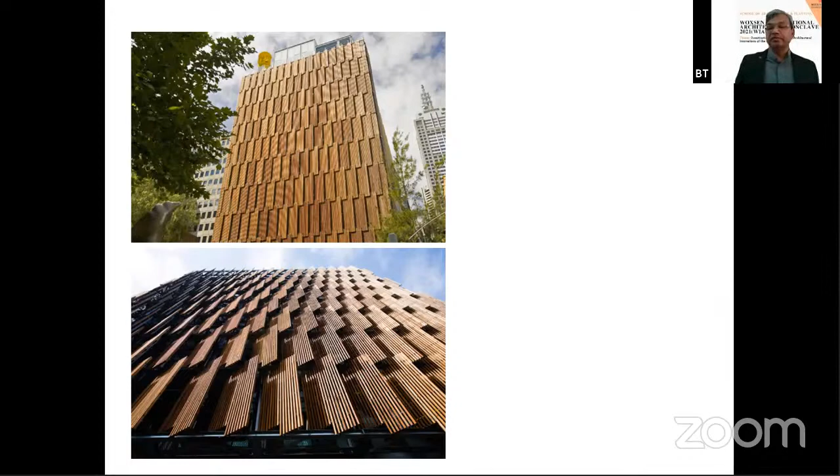This is a very famous building I'd like to show at the end of the presentation: the CH2 building in Melbourne, done by DesignInc, wherein you can see the facade moves. These are very simple wood louvers, and they mechanically move depending on the weather, day or night. And of course, roof lights have been quite popular. Most of these roofs now have solar panels, and the facades are protected from there.

Sometimes the buildings actually shy away from addressing people because they are meant to be hidden, things like data centers, security buildings, maintenance buildings, very large equipment want to be hidden, and the facades provide for that. It's like completely blocked facades, wherein the landscape comes in upfront and takes away that expression. So you are looking at a building behind landscapes.

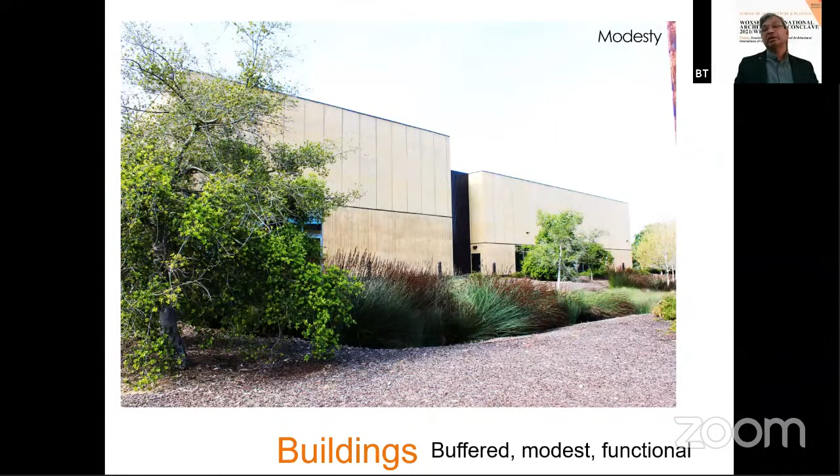And facades come with, of course, whatever locally available materials. Architect Sai talked about how important it is to look at what is locally available, rather than importing Italian marble or Italian louvers or American solar panels, etc. Because you need to look at what's really next door to you. You should go to the next door shop and look at what kind of materials we really have, rather than dreaming of something that's not available. Because there itself you are faltering, you're creating a loss of energy and cost.

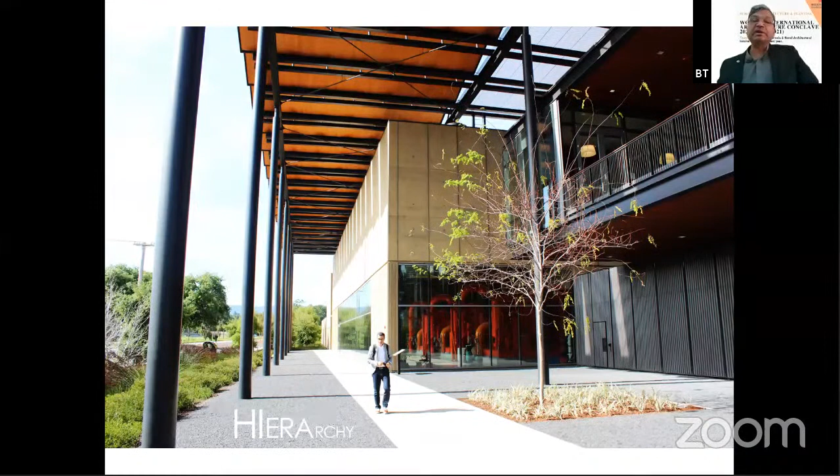So for Kuwait particularly, we have a lot of good precast panel manufacturers. It's a cheap way to clad your buildings or create a second skin. And these are some of the examples. Here you can see that the skin has been applied in various different materials. So when you start looking at options for your facades, you have several options depending again on what you want to do with the interior.

Whether you want to shade the interiors, which is right here, what you see is internal shading by drawn louvers, drawn curtains. So there becomes a second skin, which is inside the building. Or here, the skin is itself a program. The skin program is a corridor, and on the right side is actually the building function. So the corridor with a skin separates the building by creating an internal environment for collaborative space, for this is a college building. So the function of the skin is now doubled by having it as a circulation space.

The skin also looks at how the landscape is playing its part. For example, the traditional buildings originally had wrap-around and deep set windows so that you're protected from climate. In here, you can look at the windows, how deep they are set, almost 1.2 meters, because that's the sun angle, the angle of incidence. So you want to protect that. So the masonry is really drawn back. It takes away space, and the double skin gives you the advantage of giving that space some use.

Sometimes the facades speak, because now with the digital environment, if you look at what's happening in the industry of visual graphics, there are a lot of facades which are playful, with graphics introduced. This is a mural by an artist in Stanford. It changes every minute. So the mural recreates itself by people who are passing by.

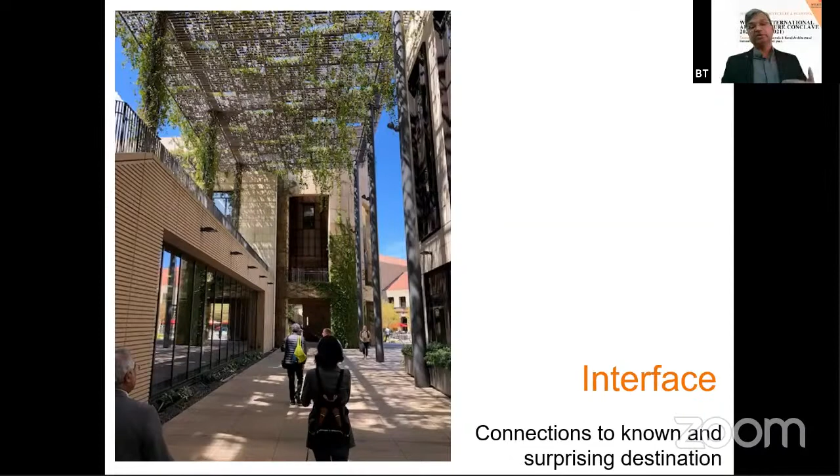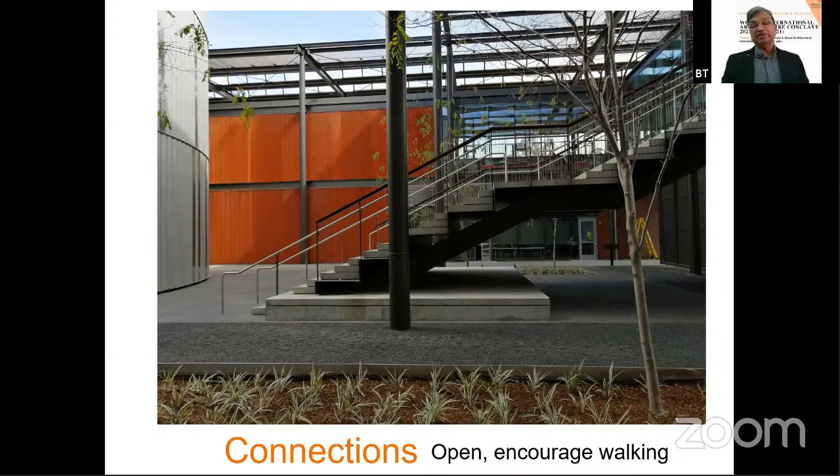And when you do the multi-layered roof, you start looking at many options to create your building facades within that space, because you already shaded the building. Now you can start to look at opening up the glazing and visually connecting outside to inside. When you do that, you have the option of putting in a lot more materials that are natural and varying.

The internal double skin, for example this one, the glazing, which is called fritted glass. Fritted means it's got spaced out etched casting in ceramic, so that it provides some translucency to the outside, but at the same time protects the inside. Or the precast, and a varied degree of precast panels.

These days, we are also looking at innovations of gathering energy by interior lighting. This is an example, again in Stanford, where research student desks are covered with a solar panel, which is kept inside. So it gathers light and turns it into solar energy that is powering their laptops. So the innovation is coming soon. Interior walls, interior facades are going to also start being energy savers and energy gatherers.

Facades that communicate: this is another digital graphics facade where, again, it changes by the minute. It actually talks to people. It creates a visual sense, and also creates knowledge. Particularly in institutions, when people are passing by it teaches you something new, something different; it's always good to interact. The facade starts interacting with you here. This is a similar picture that I have shown earlier. This is the graphics.

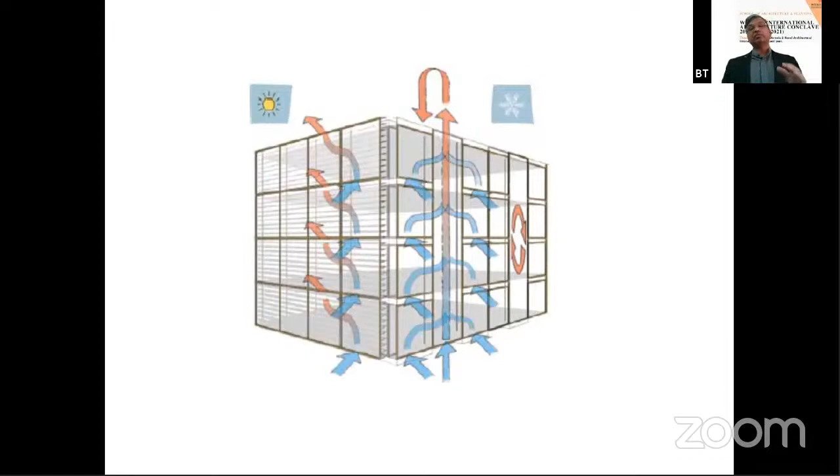So when we start designing buildings, I believe the most important aspect that students should be looking at is this: how you are trying to save energy, produce energy, how you're creating your innovative facade with these aspects. So those studies are most important. The climate class, I think, is the most important to do this. I just want to end this with a specific design that's very innovatively done in Melbourne that I talked to you about.

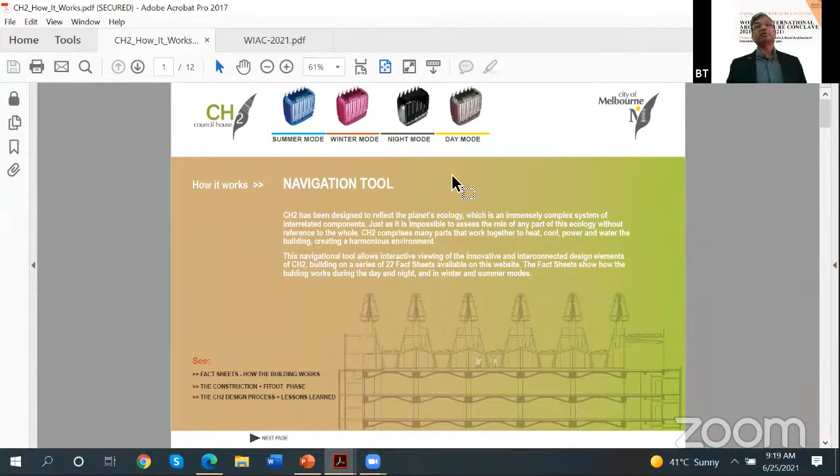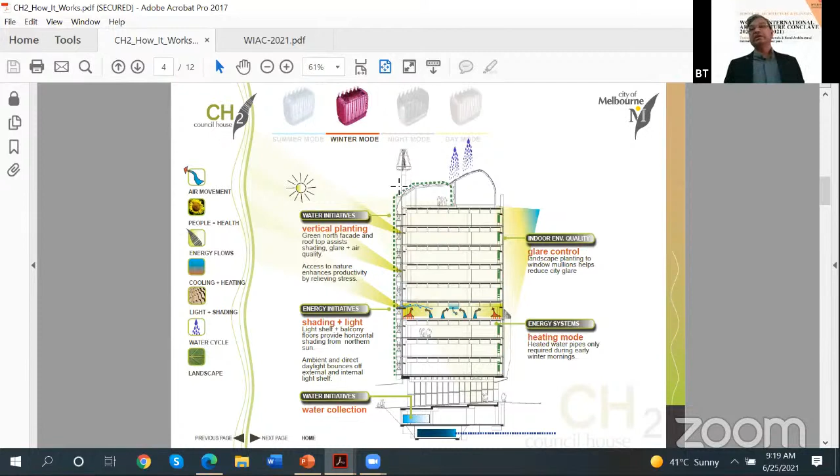This one shows how the building is treated just like a human being. It has a mode at every time. For example, it has a summer mode. So the building functions when it is summer in a different way to winter. So it automatically controls itself, just like a human being. If it is summer, you would wear a t-shirt and go out with shorts. But if it is winter, you have to wear a pullover or a jacket and go out. So it's the same way the building treats itself and functions. So that's so innovatively done.

And at the same time, it has a night mode and a day mode. The building's mechanical facade services turn around and then allow the light, allow the wind or the air to flow through the entire building, just like what we do on a daily basis. I think that's really something to talk about. This is done by Design Inc from Melbourne, and a great building.

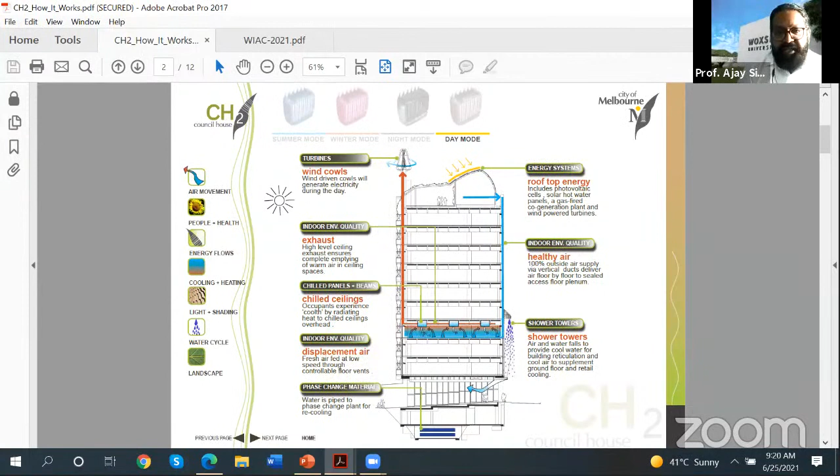Yes, sir. It was indeed enriching for the students of architecture. Now they'll start to look at the facade from a completely different perspective. I hope they do look at it from a completely different perspective. And with the input you have given, I'm sure they're going to do even better. You have talked about how architecture should speak, communicate, and express. So that's one point I would definitely agree with, and the students also need to look at it. And there's always this question of can I drink wine from a teacup, or can I drink tea from a wine cup?

So that's always there. And the use of jali work, what you stressed about the jali work, and building dynamic architecture, which actually moves, moving architecture and all. That's really a great concept which you've explained to the students. And walls that talk, that was totally innovative. I think it takes a lot of innovativeness for that. So the buildings are talking to you. You're walking by, and the buildings are actually talking to you. And there are some great designs which you have shared with us.